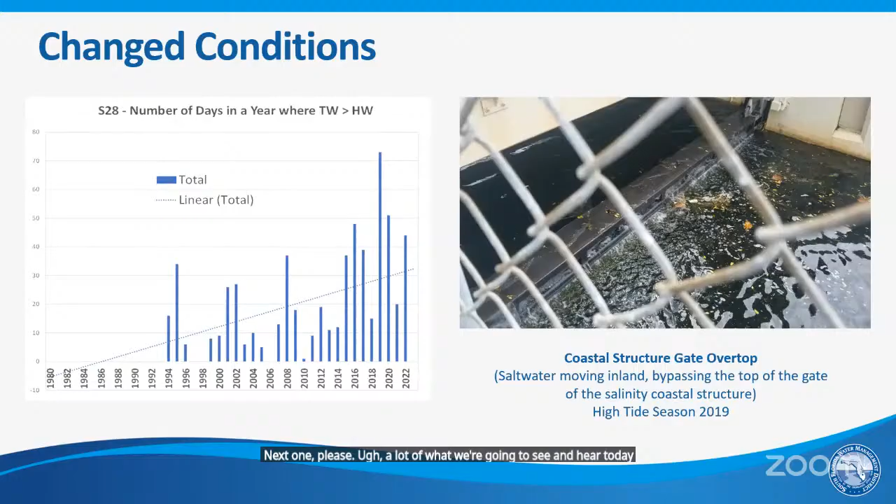A lot of what we're going to see and hear today is also related to those changing conditions on top of what we have in terms of urbanization, land development, population increase. In our system, we are also observing increasing sea level rise. Our system is a gravity-based system, and the video here is playing water from the ocean overtopping one of our existing gates. That was designed, of course, with some freeboard to avoid saltwater moving inland and to control levels inland.

We certainly have observed reduction in the performance of the system, and this is a lot of what we're going to be addressing here today in terms of what can we do, what are the adaptation needs that will help us to continue to operate the system into the future, knowing that we need to maintain level of service or enhance flood protection level of services in those communities.

In the left, we see a chart that plots the number of days that we have the ocean levels higher than the inland levels, meaning that when we depend on a gravity system, if your downstream ocean level is higher, you basically cannot discharge during that period of time. So we are certainly seeing an increase in the number of days that these conditions occur, again, limiting the performance in our capacity to drain out of those basins. Next one, please.

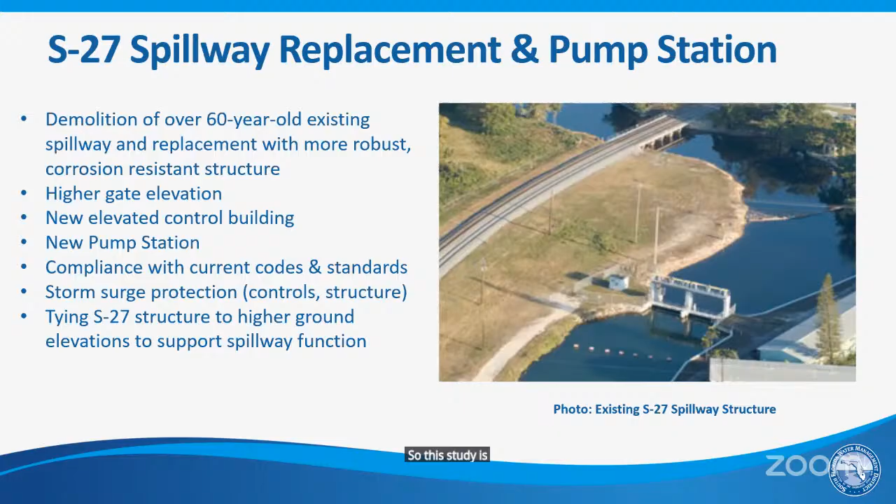So the design of this structure is completed. We have submitted a package to FEMA. We did receive hazard mitigation funds for this phase 1 of the project. So we completed design and we submitted that design and all the environmental historical preservation package to FEMA about a month ago. And we are really, again, aiming to restore the design discharge capacity that we have lost, increase flexibility, and of course, consider downstream conditions.

We are looking here at a very tight site. So our design already presented limitations to us on how much we can grow this structure and all the components that are needed. So we have access limitations, constructability, FPL, other utilities, a lot of conditions that really present some limitations on even how much we can do at the site. But we do have a solution here. We are advancing this design and aiming to begin construction, upon all the reviews and funding confirmations, at the beginning of 2026.

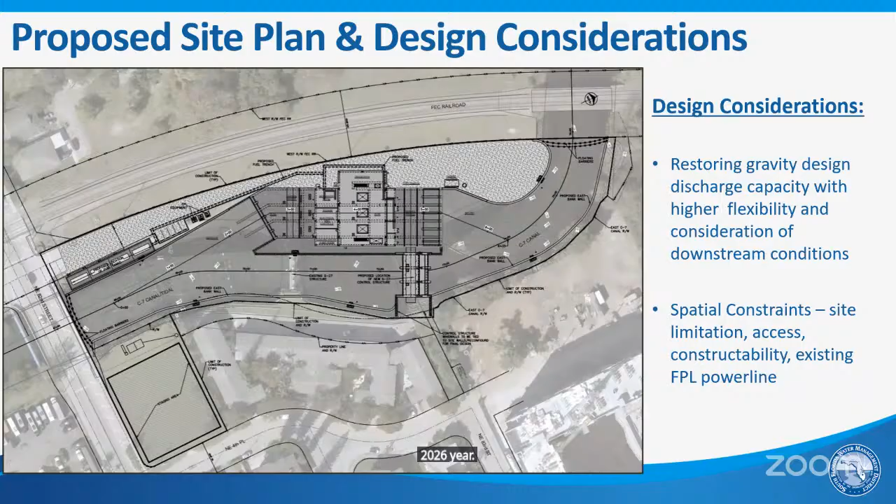So as we step into the modeling considerations and assumptions, of course, knowing what we are designing already in the basin is an important assumption and consideration as we advance basin-wide solutions, right? This is one piece of the solution. We are looking at the main structure here and improving its capacity. But there are a lot of additional solutions, and I love this picture. That's how I'm going to end the presentation. As we look here, the water management district is focusing on draining, right? Structural capacity in the basin to continue to drain the basin, move flood risks away from the communities, and allow the functions to exist during those conditions in the communities.

Of course, we have additional strategies that are being advanced. We have a series of non-structural measures that are being prioritized by communities, including elevation, acquisition, relocation, flood warning systems. We have a lot of localized solutions that also need to exist. Even if we improve the main system, we are going to see there is significant residual risk. So we need to connect the whole system in a way that we really are effective in draining the basin out. So aligning project priorities and understanding how we can effectively reduce flood risks is also a main goal of this study.

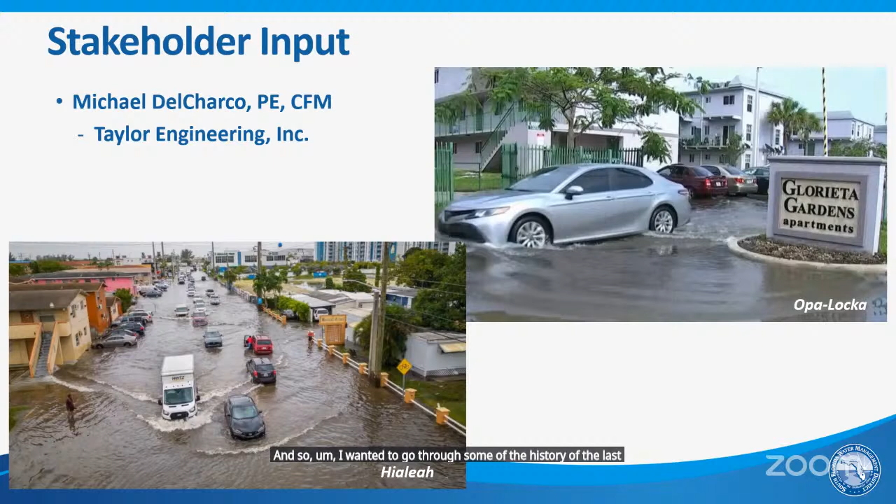Thank you, Ann. Yep, I'm Michael DelCharco. I'm the project manager for the contractor, Taylor Engineering, and we've been working with the district on this project for a while. And so I wanted to go through some of the history of the last year's events. If you'll go to the next slide, we had, if you recall, a stakeholder meeting on April 9th. Before that, we had a stakeholder survey that we sent out asking for mitigation projects and to understand what you all were doing within the basin.

Then on April 9th, we had a workshop and had a great in-person meeting. And then after that, we met with each of the communities shown there. So throughout June and August, meeting with each of you to talk about what mitigation projects you're doing. And we captured as much of that information as we could. Next slide. So I wanted to go through quickly some of that information and just point out that we heard you. We really valued that input. We captured that in a summary, created some maps with it.

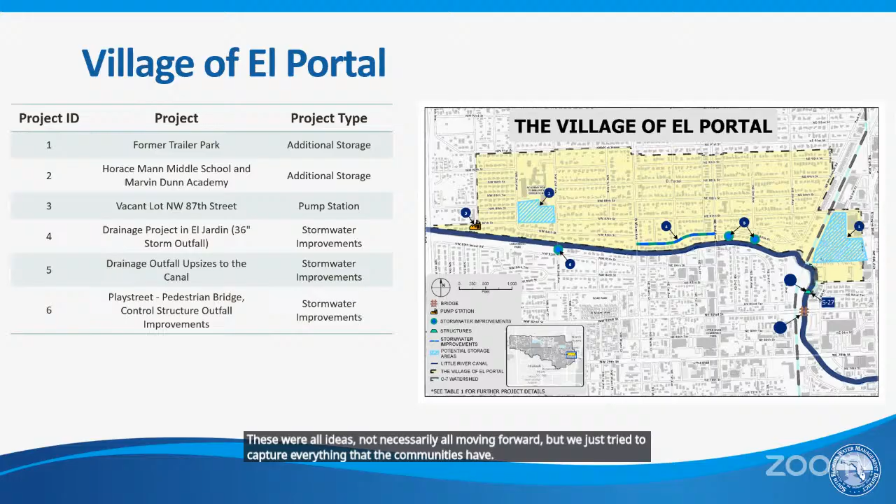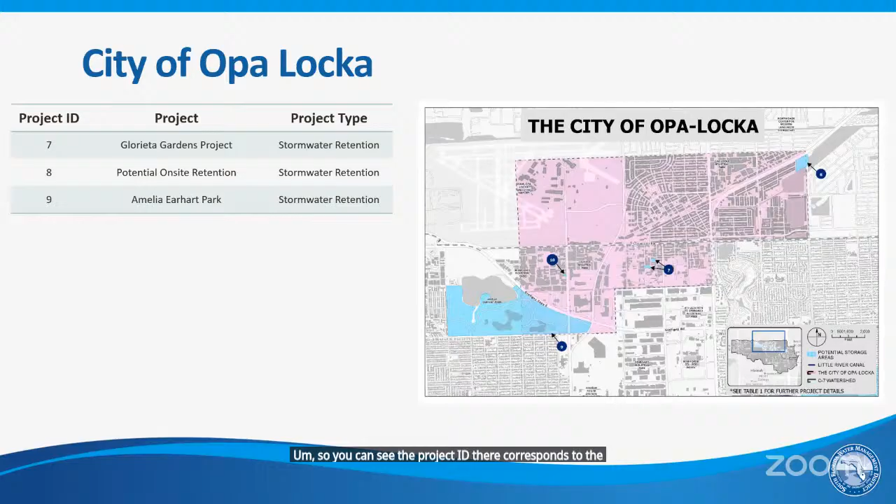And they're shown here. So, for example, the village of El Portal pointed out some additional storage features, a pump station, stormwater improvements. These were all ideas, not necessarily all moving forward, but we just tried to capture everything that the communities have. So this is an example from El Portal. The city of Opa-locka had several stormwater retention areas. So you can see the project ID there corresponds to the numbers in the figure. Next. And then the city of Hialeah also with some stormwater improvements and some dry retention, pervious pavement areas.

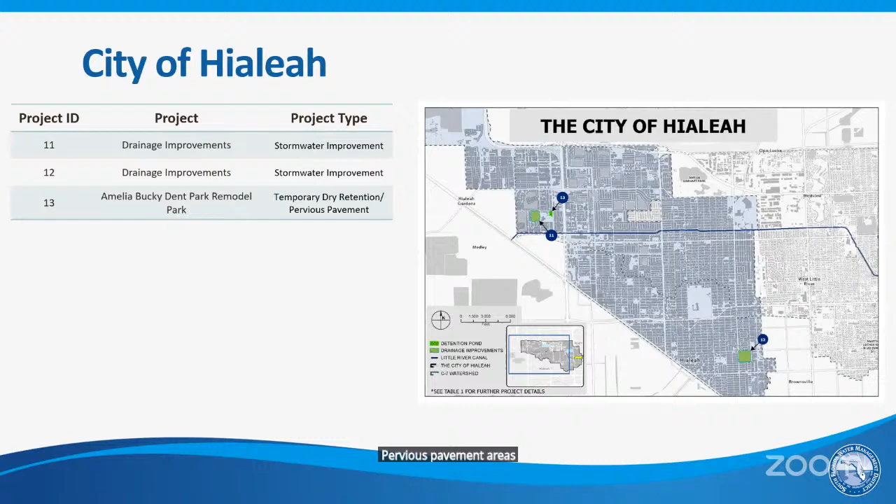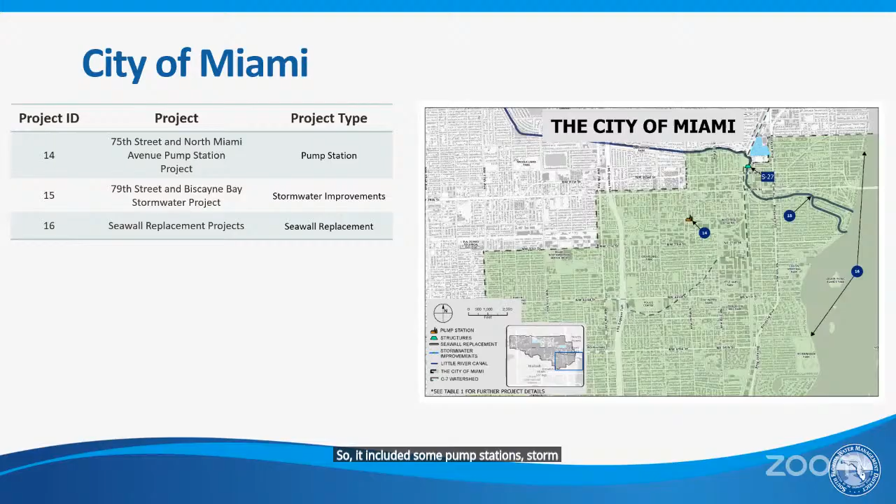Next. The city of Miami, if you haven't seen their vulnerability and adaptation plan, they have a great study that highlights a lot of projects. We only show here the ones that were within the C-7 basin proper. So it included some pump stations, stormwater improvements, and seawall replacement. Next. And then Little River HOA, they gave some great pictures and examples of flooding in their area, talked a lot about different interests of theirs, flood control structures, water quality, expanded green spaces, and then again, gave us some great examples of flooding in the area.

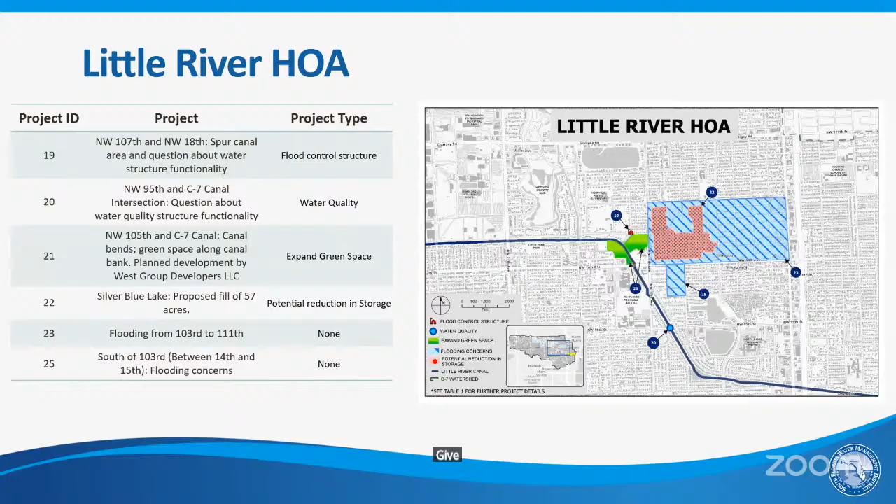Next. Okay, so I just wanted to say that all these projects are really important, and we really acknowledge the benefits of all of these projects. These are the community-driven projects. They address local issues that are very concerning to the communities, the residents, and so we certainly promote and encourage that these projects all move forward. At the basin scale, they won't all be addressed directly in our modeling, but they will certainly be moving forward as we look at all the different options available in this basin. Next.

And now I'll pass it over to Joe Wilder, also with Taylor Engineering and our lead modeler for this project. Joe? Thanks, Michael. Yeah, hi everyone, Joseph Wilder. Like Michael said, I'm the lead modeler for this study, and today I'm going to walk through the alternative mitigation strategies that we've been examining.

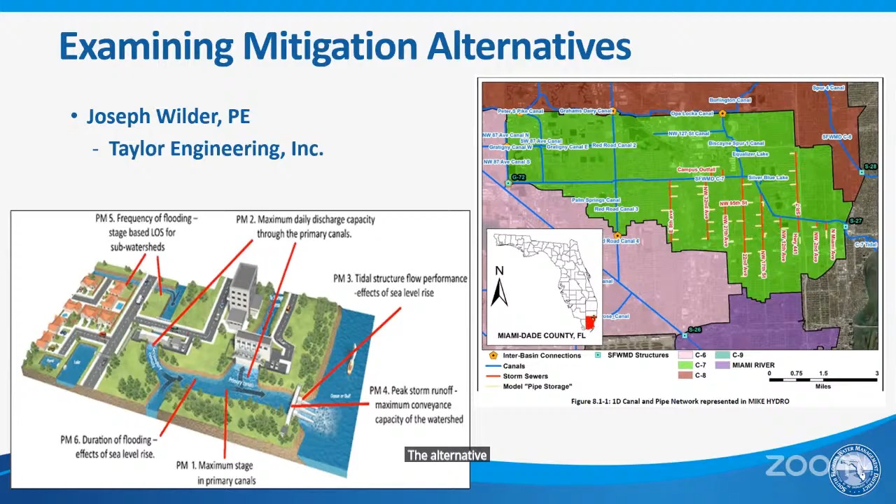But before we take a look at the three alternatives, I really just want to reiterate what Ann said and how we got to this point. We started by examining the system without mitigation. This included analyzing the flood protection level of service that the C7 canal system provides under existing conditions and then future conditions without mitigation. This was done to really understand the potential flooding issues that this basin faces or may have in the face of climate challenges such as sea level rise and more intense rainfall events.

Once we understood the baseline conditions, we really shifted our focus to identifying potential solutions. A big part of that was collecting the projects that Michael just presented, and from there, we started analyzing them. We analyzed a wide range of projects: regional scale projects, local scale projects, programmatic projects, the community derived projects. Many of these were either brought forth by the community or were influenced or derived to try to cover some of those targeted areas. Other projects we came up with: we listened to what was needed and tried to figure out a modeling solution that shows promise in other areas that may work well in this basin.

This process really started out more qualitative. We had lots of discussions about each project's potential benefits, how they may address flooding in certain areas, or how it may help in the grand scheme of the issues brought forth by the community. From there, we moved into a more quantitative model-based approach. We ran dozens of model simulation iterations where we put in different types of projects, different scales of those projects, larger infrastructure, smaller infrastructure, really to get a sense of how these projects are influencing flood response to different stressors. These stressors are, again, high rainfall events, storm surge, sea level rise.

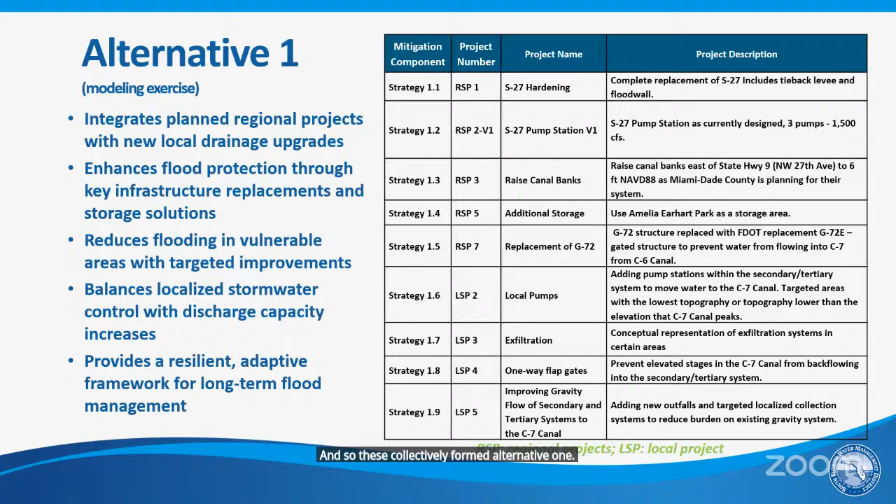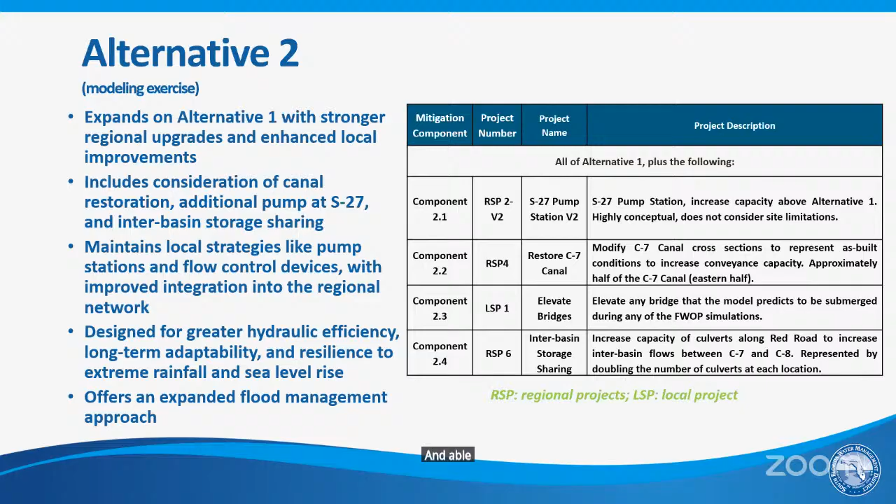And so Alt 2 was designed really to have a greater hydraulic efficiency and long-term adaptability, and hopefully provide more resilience to extreme rainfall and sea level by having that larger pump and being able to move more water out when tailwaters are higher. Next slide.

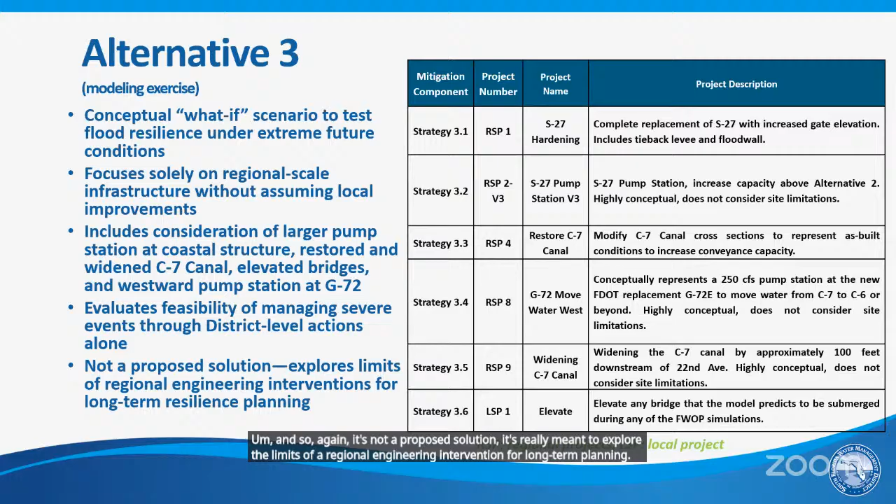So in the next few slides, we're going to take a look at maximum canal stage profiles, and really it's going to compare future conditions with mitigation versus our future conditions without mitigation and our baseline existing condition scenario. And so these figures may look familiar to you. They may be new. And so I'm going to take a minute and explain what you're seeing on these figures, and then we'll bring in added data.

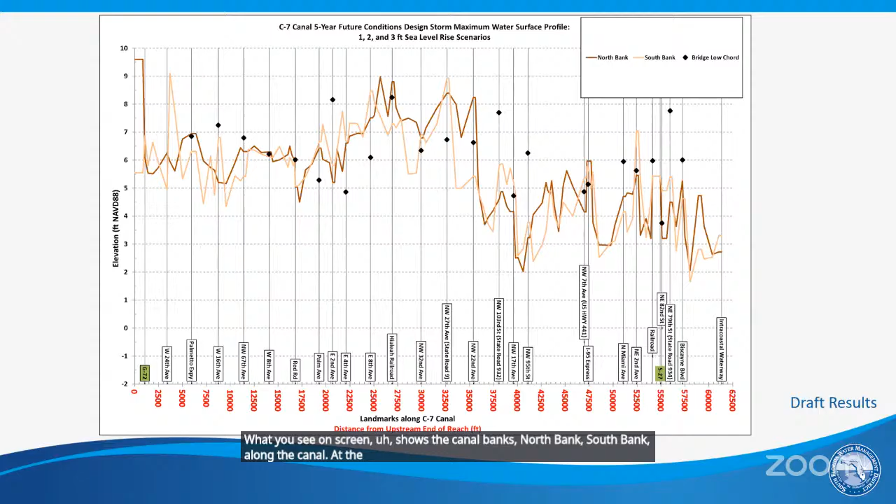And so what you see on screen shows the canal banks, north bank, south bank, along the canal. At the bottom, there's landmarks and a distance from upstream of the canal to the downstream end. So G72, that would be the far west side of the system. S27, that's going to be the tidal structure, and then the Intracoastal Waterway all the way to the right. And then the black dots, those are going to be the bridge low chords, so the elevation at which all those road crossings would become submerged.

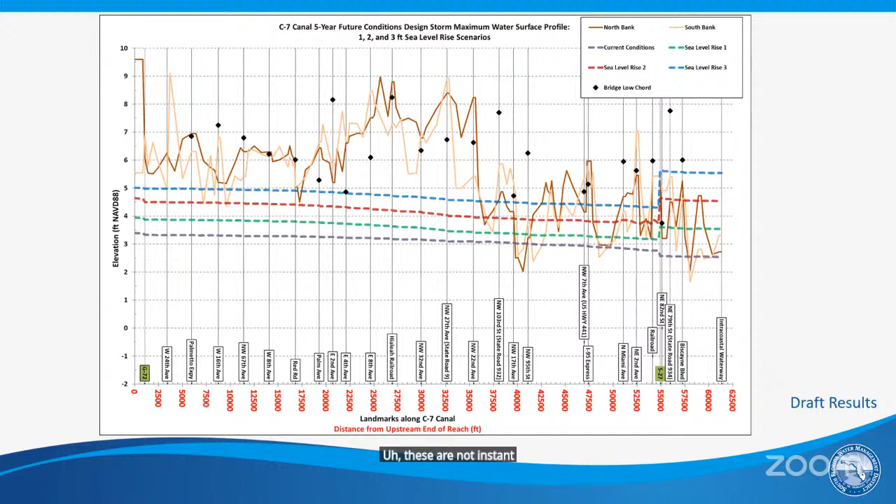And so we'll start to add in some canal profiles. And so now what you see here is 4 simulated maximum profiles. These are not an instantaneous snapshot in time. This is going to be the absolute maximum water level across the entire canal, regardless of timing. And so the purple line is going to show our current or existing conditions, sea level rise 0. And then green, red, and blue are going to show the maximum levels for the sea level rise 1, 2, and 3 events. And this is all for the 5-year storm event. And so this figure is really just, previous slide, please.

So this figure is really just one facet that we examine when identifying potential problems and solutions, but it's helpful in identifying a few key pieces of information. And so one piece that we can see is whether or not there's canal bank exceedances, which we can then kind of correlate back to our flood depth maps to see, are these exceedances just kind of a nuisance, or are they leading to significant flooding of lands?

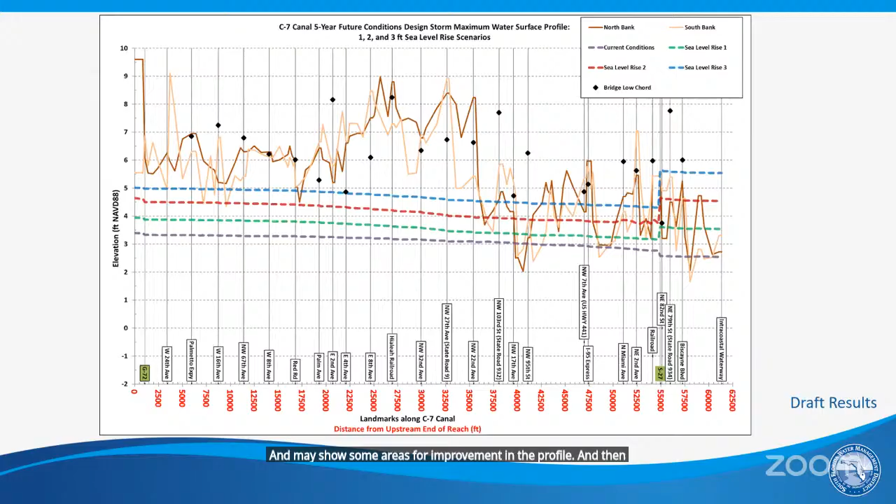Another piece of information that these figures show is potentially areas that have high head loss and restrictions. Maybe there's a bridge that's submerged that's causing a ton of loss, and may show some areas for improvement in the profile. And then again, that third piece is going to be where any of these bridges are, and it's not only a hydraulic inefficiency, but it could also be a safety concern, especially if it's an evacuation route. So looking at all those pieces of information together allows us to get a certain picture on what's happening and how the alternatives that we're going to look at compare.

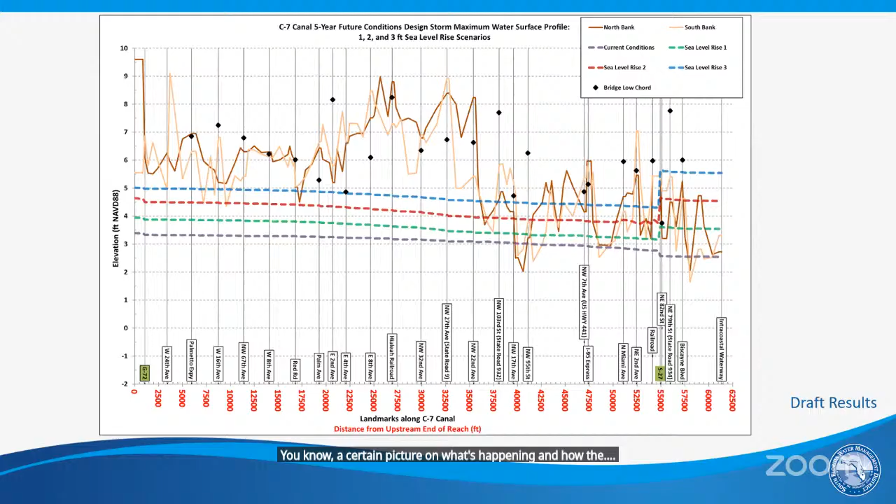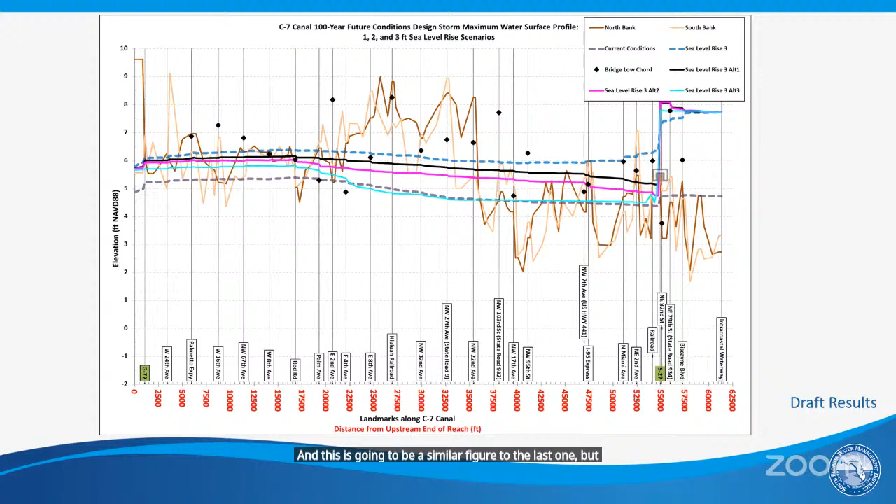And then this is going to be a similar figure to the last one, but this shifts up to the 100-year event. Again, we can see the relative performance between these three alternatives, and then where we would be without any intervention, and then where we are today if a large storm was to occur. Again, like the previous slide, the black and the pink lines, there's actually no bank exceedance there, assumed to be raised in that scenario. And then alt 3, even with the larger pumps that we'll talk about, there's still a significant bank exceedance.

So when we look at some of this bank exceedance, it's hard to know just from this figure, and this is why we look at some of the other depth figures that we'll examine here in a minute, as there's bank exceedances off to the west side too. And so you may be wondering, are those consequential? Are they significant? And so it really depends when we get into the maps, but oftentimes they may be contained within just a small narrow strip within the canal, higher topography areas, whereas some of them, especially towards the east side, lower topography, that flooding really starts to spread out and cause widespread issues. Next slide.

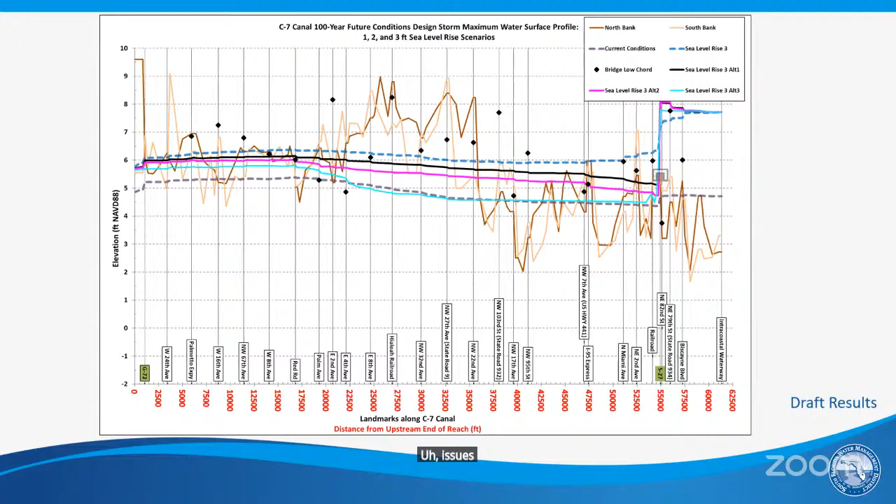Okay, so the next handful of figures we're going to look at are going to show the flood depth differences when we look at future conditions with mitigation versus without. Next slide.

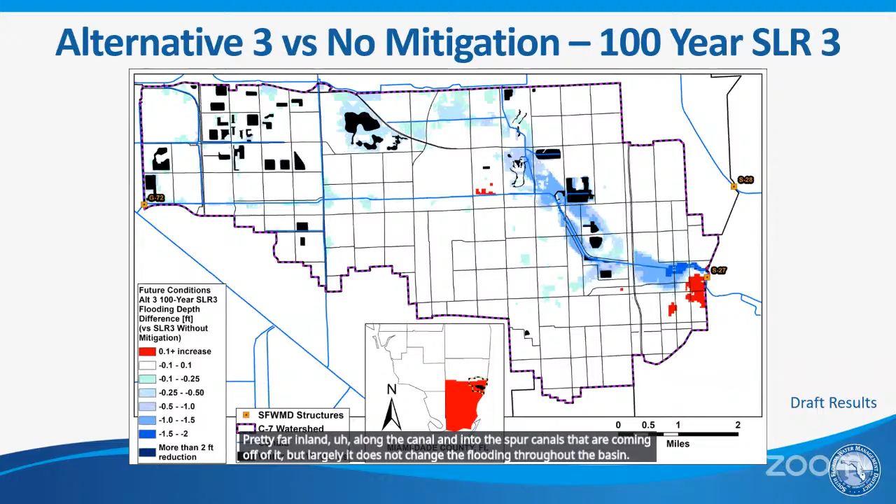And then Alt 3, same thing. Again, there's really a significant flood reduction benefit from these regional systems, but they're not going far out into the system. It's largely along the primary canal. You can see it extends pretty far inland along the canal and into the spur canals that are coming off of it, but largely it does not change the flooding throughout the basin. And again, that's because there are no localized projects included.

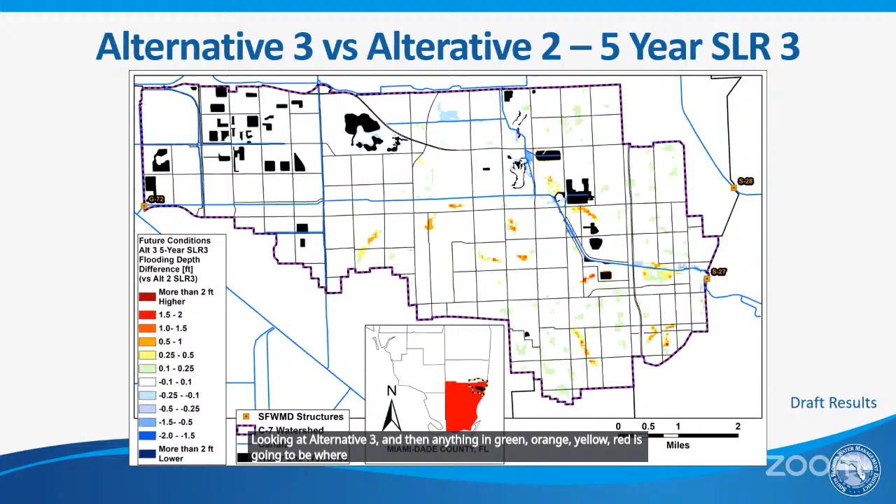Alternative 3 versus 2 is where we can really start to see the benefits, looking at the difference between the collective benefits of just the regional system to the local system. And so this figure shows the flood reduction benefits when we go from 3 to 2. The blue palette is going to be anywhere that has more flood reduction looking at alternative 3, and then anything in green, orange, yellow, red is going to be where alternative 2 has more flood reduction benefits than alternative 3.

Next, yep. And so it's a little bit more obvious again with the 100-year event, same scale. And so really everything far away from the primary canal, even along the canal, that's there in green, orange, yellow, red, are direct contributions of the local type of projects that we've put into the model. There's definitely some localized areas along the canal that have a higher level of benefit from alternative 3, which is largely because of just how drastic of a pump station we put in to represent it. But when you look at overall benefits throughout the community, those local scale projects have way more pull and way more impact than just a regional system can have alone.

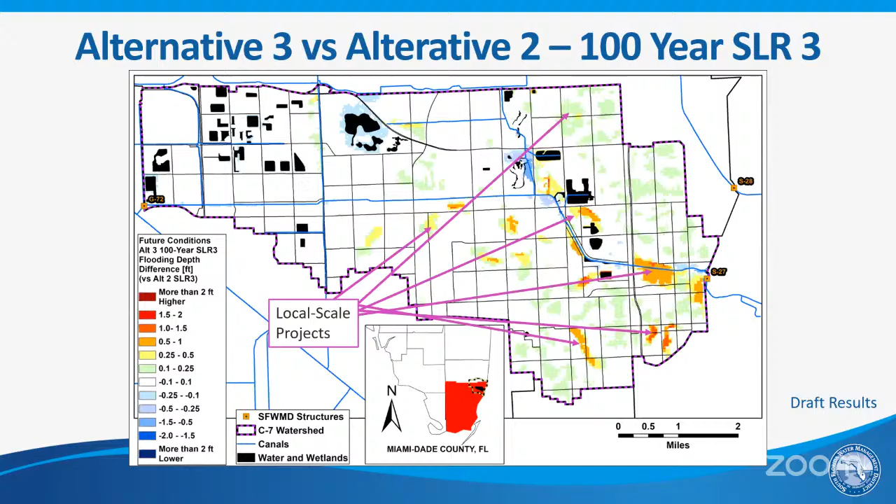And so in some of these areas, there's a large orange blob right upstream of S27 in Larchmont Park and El Portal. So this is largely a combination of: there's a regional pump there at S27 that's helping, but then there's local pumps within that area. There's canal banks that are raised to help keep water out. And so those types of local projects, in combination with the regional pump station, really have some high level of benefits. Next up.

And so we're going to walk through some next steps, kind of where do we go from here? Now that we've run our sea level rise 0 and sea level rise 3 for these three alternatives, we're going to evaluate the estimated annual damages and the benefit cost ratios that these three alternatives have using the district's FIAT toolkit. Then we're going to select a baseline alternative for our strategically selected plan development.

And this is going to be based on several key pieces, but some of them are the economic analysis, those individual project and alternative performances in terms of hydraulic and hydrologic modeling performance. We're going to use some engineering judgment as well as some other previous model runs and criteria that we've seen along the way. Then we're going to conduct a relative contribution analysis or an optimization analysis by removing individual components from the selected baseline temporarily to assess their relative impact to flood reduction under our sea level rise 3 scenario.

And so then we will refine our final project array by retaining impactful components, try to optimize the cost effectiveness and figure out which projects collectively contribute most to the flood risk reduction and have meaningful cost relationships. And then we'll simulate our strategically selected plan under our full comprehensive range of storm events and sea level rise scenarios, and then complete the full FPLOS analysis. From there, we'll use those updated model results to perform a final damage assessment and determine the total economic benefits and ratios. Next slide.